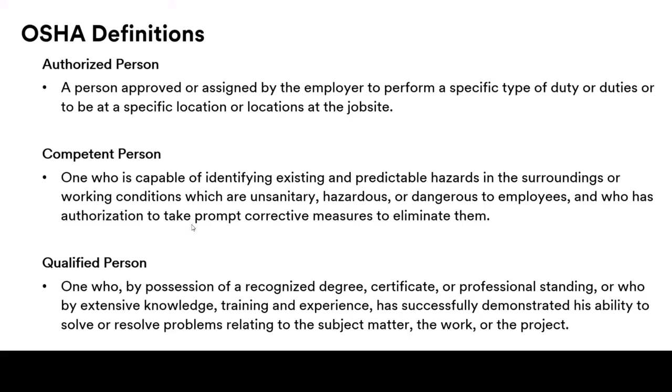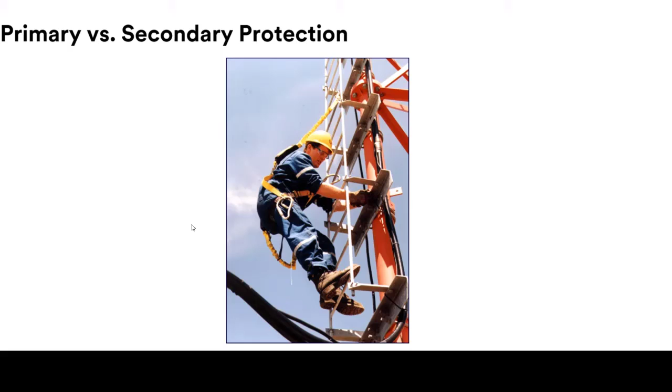When working at heights, all workers must have two lines of defense against a fall. The first line of defense is their primary form of fall protection, which is the worker's main support system. Typically, it's their hands and their feet, or their sense of balance. The second would be a backup in case their primary fails and is some form of fall protection such as guardrails, fall restraint, or fall arrest.

When doing your job hazard analysis, you should follow the hierarchy of fall protection. Number one, you should try to eliminate the hazard. This may be done by engineering out the hazard or modifying work procedures. Some examples are relocating an electrical panel box to a more accessible location, using a pole or an adapter to change a light bulb, installing a chain on an overhead valve.

Number two, you should try and deny access. These are solutions that keep individuals from accessing the hazard. Examples are guardrail systems, which are barriers installed to prevent personnel from falling to lower levels. Where suitable, they protect the greater number of employees with little or no training needed.

Thirdly, fall arrest. This is the last resort. This requires the greatest amount of training and responsibility. This means that the worker must wear equipment that allows for a connection between the worker's harness and an anchor point that is designed to stop a fall and minimize injury after it has begun. Proper training and diligent communication is important.

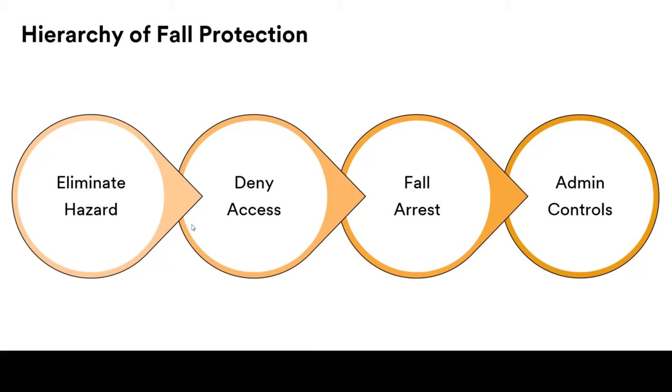And lastly, administrative controls. These are work practices and procedures designed to warn a worker before he or she approaches a fall hazard. It is the least efficient means of fall protection. Here you can see some examples of engineering out the hazard. On the left is the pole with the adapter to change a light bulb. On the right is a chain on a valve.

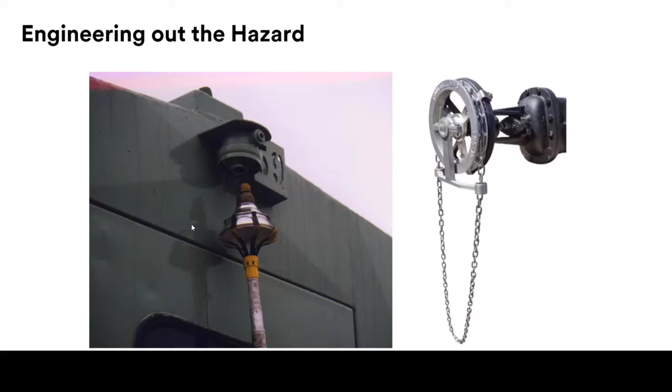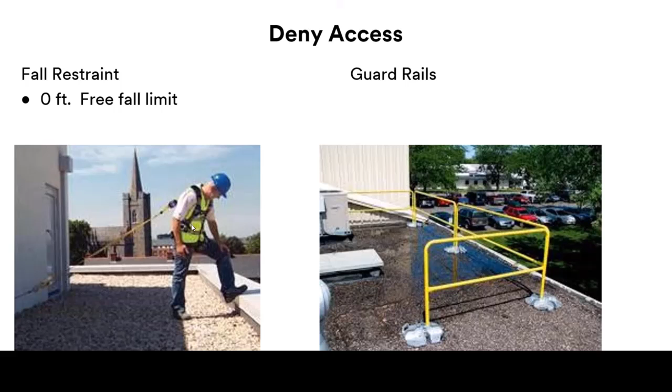These are examples of denying access. Guardrail systems prevent the worker from accessing the hazard, and fall restraint limits the fall distances because they can't reach the edge. Fall arrest is the last resort. It is a system that allows a worker to fall and is designed to reduce the impact forces placed on the worker's body.

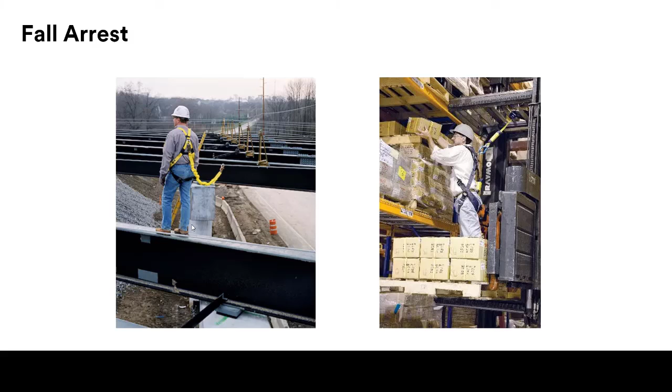To remember the main components of an active fall arrest system, just remember A, B, C. A is anchorage. A secure point of attachment, anchorage connectors will vary. Body support means it's a harness that's designed to distribute the forces across the body to provide a connection point on the worker for personal fall arrest systems. C, connectors. Connectors are lanyards or self-retracting devices that connect a worker's harness to the anchorage.

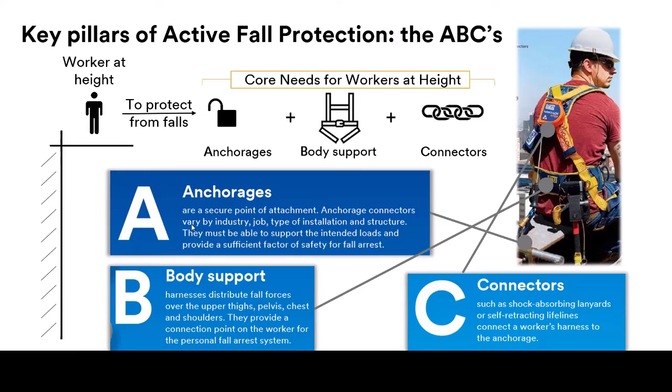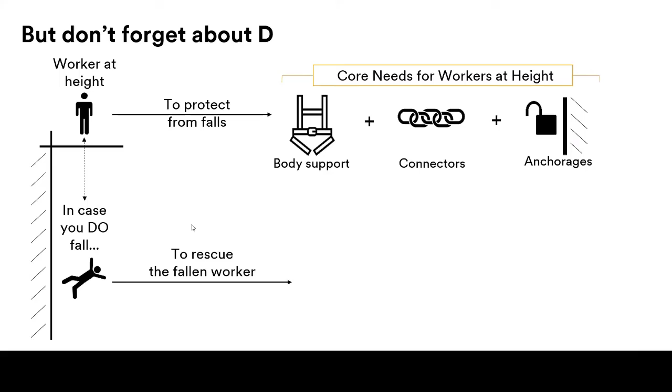The ABCs are part of a complete fall arrest system. You can't have one without the other. The core of your fall arrest systems are your ABCs, but don't forget about D, descent and rescue. Descent and rescue is a key component of your fall arrest system as well. A rescue plan must be in place that ensures prompt rescue or that an employee can self-rescue. Keep in mind that dialing 911 is not part of a rescue plan.

Fall arrest equipment that has been exposed to a fall arrest or fails an inspection must be removed from service immediately. Some equipment, such as self-retracting devices, may be sent back to the manufacturer where they are repaired and can be put back into service.

The anchor refers to the structure, wood, steel, or concrete. The anchorage connector is the adapter or the device used to attach to the structure. All anchorages must provide a secure point of attachment for a complete personal fall arrest system. They must be capable of supporting a load of 5,000 pounds or of meeting OSHA's criteria of a 2-to-1 safety factor. The question to ask is, will it hold the weight of my 3/4 ton pickup truck? If you don't think it will, then don't tie off to it.

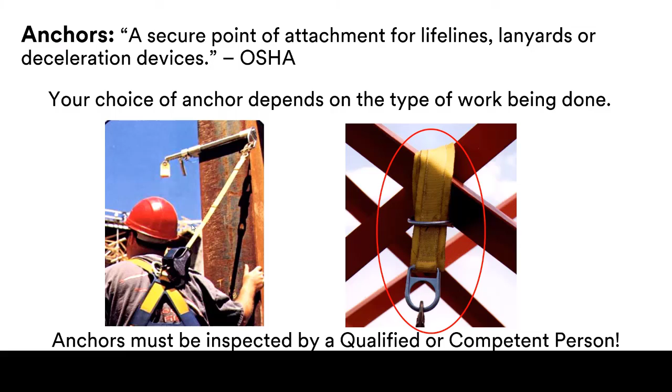Your choice of anchor depends on the type of work being done. They can be fixed or mobile, permanent or portable. There are two types of anchor points, non-certified and certified. Non-certified or improvised anchors are off-the-shelf solutions that are attached to structures using a person's best guess. They must be rated for 5,000 pounds, and you should ask yourself, will it hold the weight of my full-size pickup truck, usually a 3/4 ton? If you're not sure, then don't tie off to it.

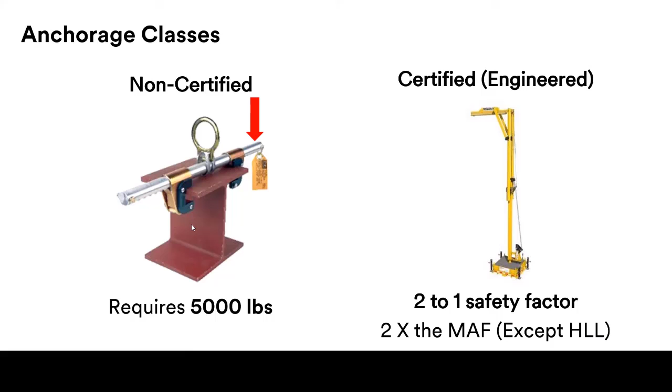In order for anchors to be certified, they must be designed and installed by an engineer and maintain a 2-to-1 safety factor. Keep a list that identifies where certified anchors are located and identify them to be used only for fall arrest. In other words, not for lifting. And you should document frequent inspections. These are some of the many examples of 3M anchorage connectors. It is crucial that you choose the correct anchorage connector for the correct application.

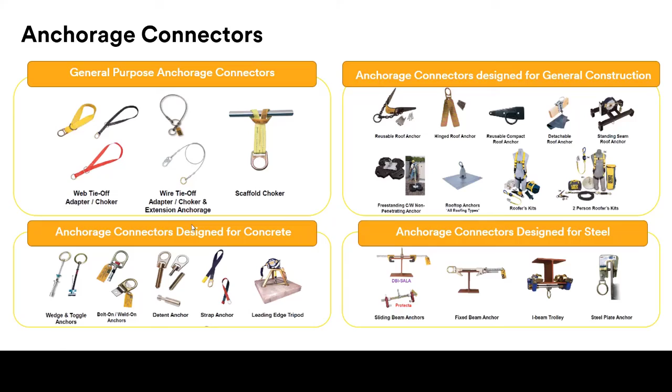Full body harnesses originated from mountaineering sit-style harnesses, which provided a more suitable distribution of the impact forces on the body compared to a waist belt. Their design moved the impact forces from internal organs around the waist to major bone and muscle groups around the pelvic girdle. Harnesses are advantageous over body belts because they better distribute the forces, they allow for prolonged tolerance of suspension, they decrease serious injury potential, they put the worker in an upright position, and it makes it easier for rescue.

Keep in mind that OSHA 1926.502 states that personal fall arrest systems shall limit the maximum arresting force on an employee to 1,800 pounds when used with a full body harness. Harnesses should be inspected prior to each use and at least once a year have a documented inspection by a competent person. You should check the 4 key components of a harness. Labels. Labels should be present and fully legible.

Check the hardware. Make sure that it is free from rust, pitting, or corrosion. Make sure that the plastic components are not damaged, broken, or distorted. Check the webbing. Check for frays, cuts, tears, burns, abrasions, paint, or contaminants that conceal the fibers. Check the stitching. There should be no broken, loose, or missing stitches. Harnesses can be cleaned with mild soap and water and then air dried.

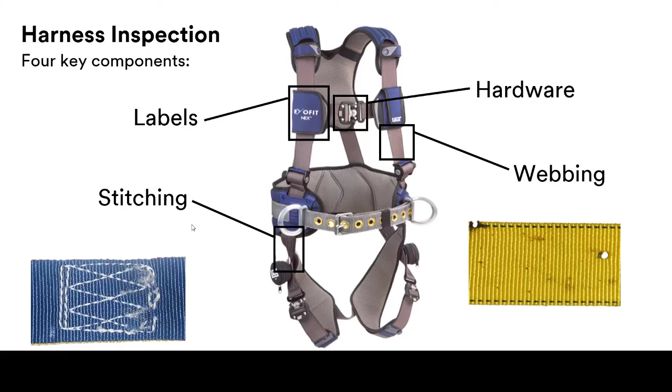Harnesses have a working weight capacity of 130 pounds to 310 pounds. DBI Sala and Protecta harnesses are tested to 420 pounds. At a minimum, a harness must have a dorsal D-ring for fall arrest, normally referred to as the back D-ring. All other D-ring configurations are optional and dependent on the work to be done.

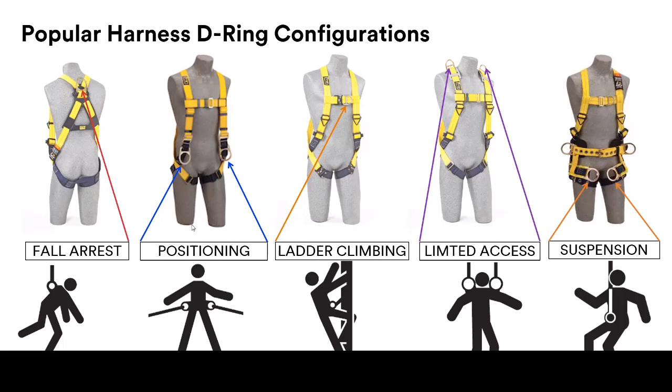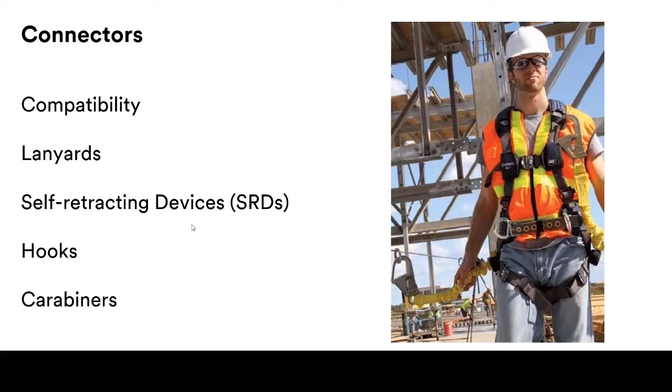Connectors are the devices that you use to attach yourself to your anchor point, and when used for fall arrest, your connecting system must have a way of absorbing energy. Examples are lanyards, hooks, carabiners, and self-retractors. When used for fall arrest, lanyards must have a means of absorbing energy, limiting the forces on the body. Additionally, they need to reduce the forces to less than 1,800 pounds according to OSHA and 900 pounds according to ANSI.

There are many different styles of lanyards, and the most common is a single leg with an external shock pack. The twin leg with an internal shock pack or stretch style is common in many different types of industries. The benefit is no bulky shock pack, and the stretch feature keeps excess webbing from getting in the way of the worker. Some lanyards are designed to tie back onto themselves. They have a more robust design that uses abrasion-resistant webbing and hooks with 5,000-pound rated gates.

Just like your harnesses, lanyards should be inspected prior to each use and at least once a year have a documented inspection by a competent person. Check the webbing for cuts, rips, tears, or frays. Look for UV damage. This is where the webbing has changed color, gotten stiff, brittle, or brown. Check the stitch patterns. Make sure that there's no broken, loose, or missing stitches. Check the shock packs. Labels should be there, and they should be fully legible.

Spend some time on the snap hooks. The best way to test them is to open them up and let them close as slowly as possible. Check to make sure that the hook meets the current ANSI 3,600 pound gate strength requirement. You should see this stamped on the gate, and the gate rating should be in pounds.

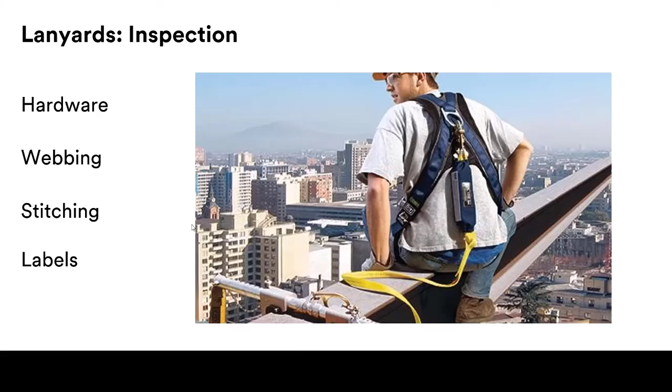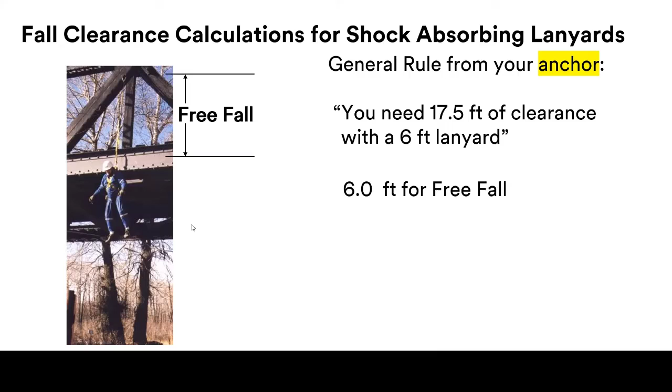If you take one thing away from this presentation, here it is. Note, fall clearance is always changing depending on the different fall arrest equipment being used. With a lanyard, fall clearance is always calculated from the height of your anchor. In this example, the total freefall distance is 6 feet. The deceleration distance is 4 feet.

We take into account the worker's height, accounting for harness stretch, that is 6 feet, and we give it a 1.5 foot safety factor. This gives us a total clearance requirement of 17.5 feet. Again, this is measured from the anchor point. So what do we do when we don't have 17.5 feet of clearance? Well, you can raise your anchor point. Remember, it is 17.5 feet from your anchor point, not necessarily your walking surface.

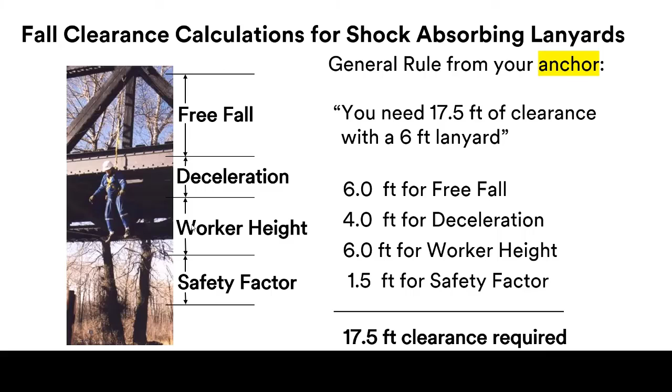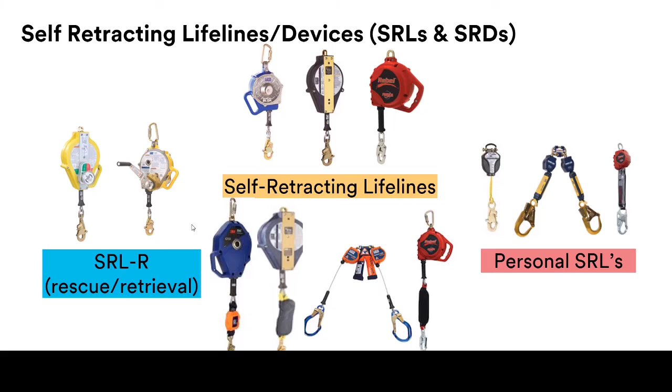Get a shorter lanyard. 6-foot lanyards are the most common, but there are shorter lanyards on the market today. Or maybe the lanyard is the wrong tool for the job. Perhaps a self-retracting lifeline would be a better solution. In many instances, self-retracting devices are advantageous over lanyards. They require shorter fall distances, most are recertifiable, and they engage once a fall has begun.

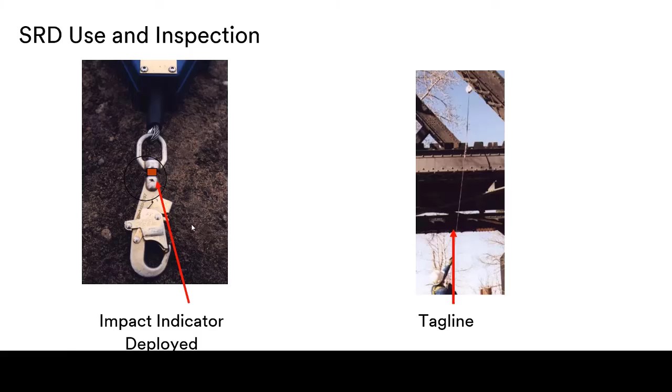Just like your harnesses and lanyards, self-retracting lifelines need to be inspected prior to use. Check the housing to ensure that it's not cracked or broken. Check the cable or web for broken strands or fibers. Check the hooks, make sure that there is no rust, pitting, or corrosion. Check the impact indicators, make sure that it has not been deployed. Always use a tagline instead of leaving the cable or web extended for long periods of time. This will protect the cable, and it reduces the possibility of damaging the coil spring.

OSHA states that the employer shall provide prompt rescue, or shall assure that employees are able to self-rescue. ANSI states that employers shall develop and maintain a written rescue procedure for every location where an active fall protection system is being used. This means that you should have a rescue plan and that you should practice that plan to rescue. What is prompt rescue? Well, it means that it must take place within 6 minutes, but every rescue situation is dependent on location and environment.

Why is prompt rescue important? Well, there may be injury. 1910.151 suggests that medical aid should be rendered within 4 to 15 minutes. If it is potentially life-threatening, then 4 minutes. OSHA does not state a time frame. Suspension trauma is considered life-threatening.

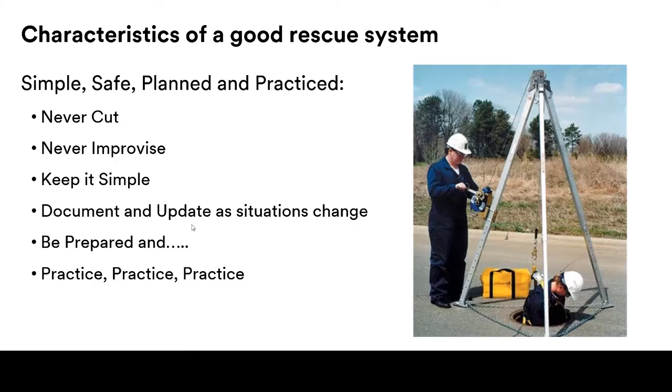When providing rescue, keep it simple, safe, and planned. Here are some characteristics of a good rescue system. You never want to cut a line, never improvise. Again, keep it simple. Document and update as the situation changes. Be prepared. Remember, you should never put yourself in a scenario where you as a rescuer can become the rescuee.